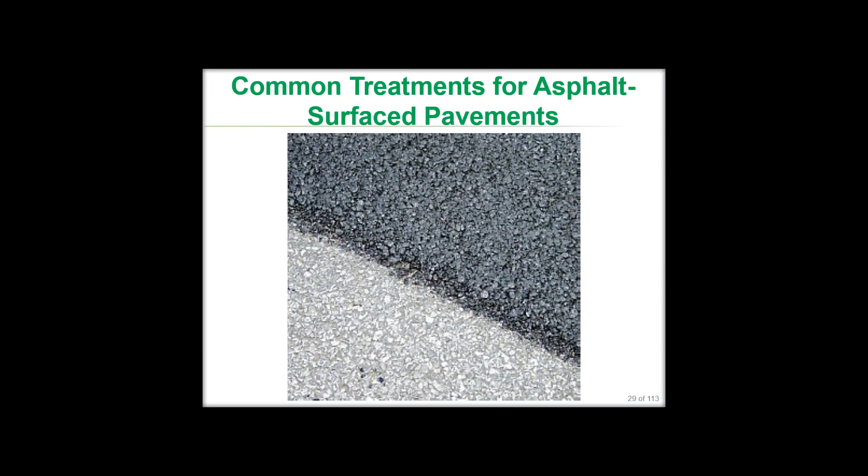Surface on a major high volume pavement, and really keep it in good functional condition if we have enough structure. There are various hot and cold surface recycling techniques that can be used that can remove some of the top surface, rejuvenate it in a way, and relay it.

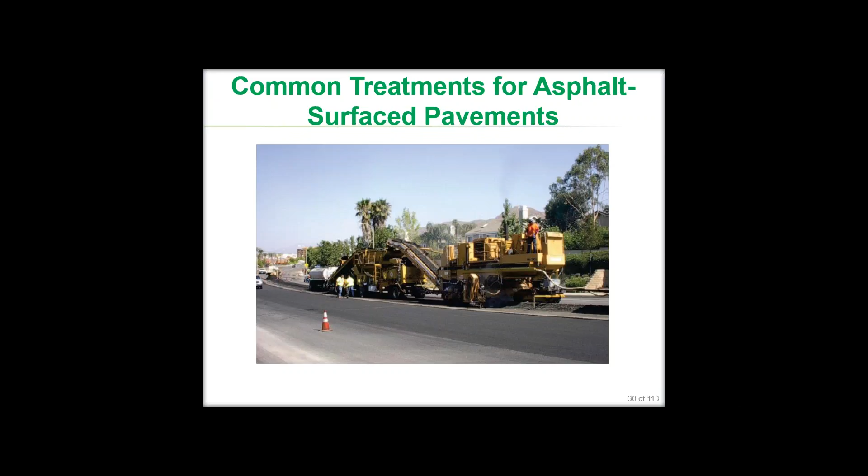I will say with the hot in place techniques, they can be very effective, but they do consume a lot of energy. And then there's also white topping options in which thin bonded concrete overlays can be put on top of asphalt pavements.

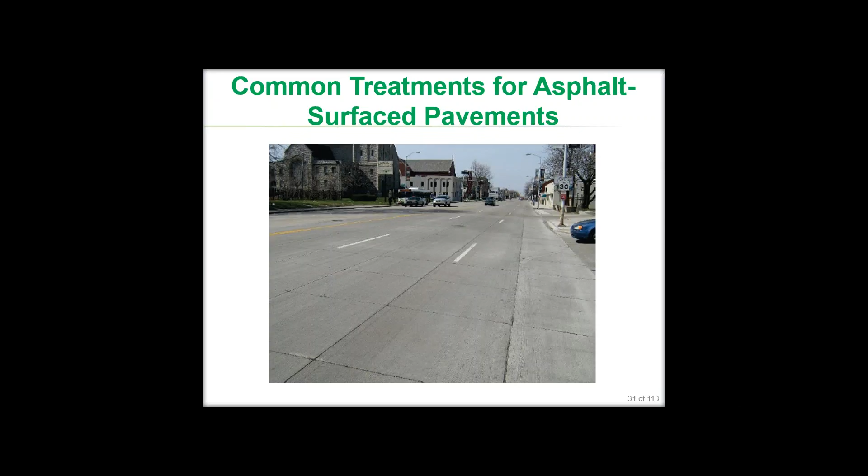When we look at some of these treatments, you'll notice that things like those thinner HMA overlays or heavy chip seals have a higher energy use and higher greenhouse gas impact than some of the lower intensity applications like fog seals or slurries.

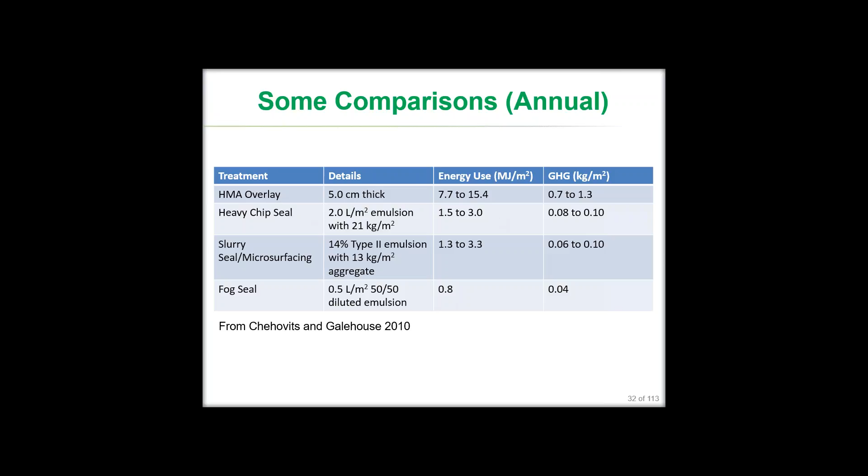But at the same time, life is almost directly proportional to this energy and greenhouse gas production. So things like fog seals will have a very short life, whereas HMA overlays can have a very long life. And so you really have to look at the best approach over the life cycle.

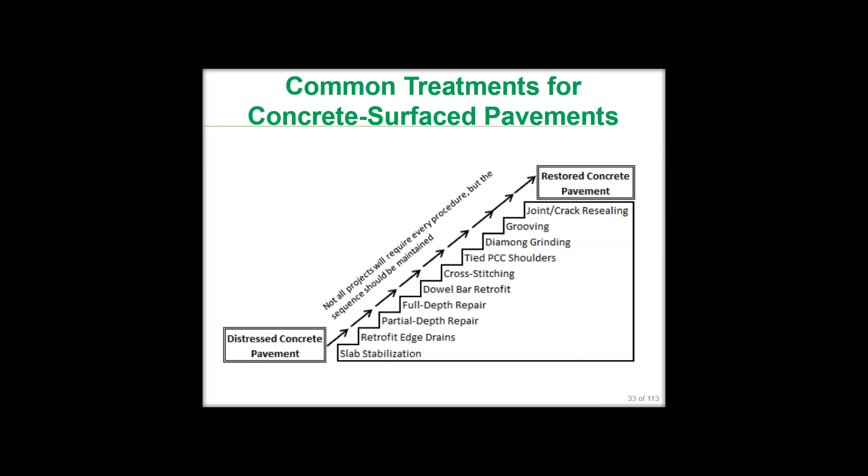Moving to concrete, there's this whole kind of tiered system as we do concrete pavement restoration. Many techniques are available, but not all projects will need every technique.

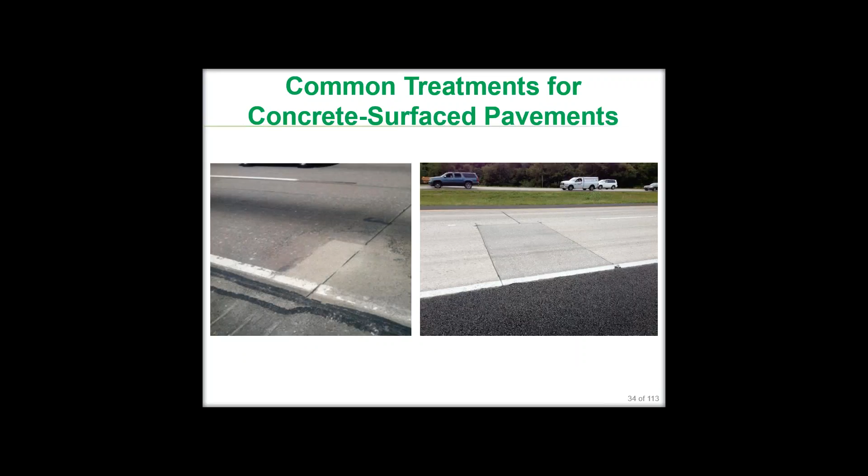Very common things that are done to restore ride quality can be partial depth repairs or full depth repairs, where you have a failure at a joint, for example.

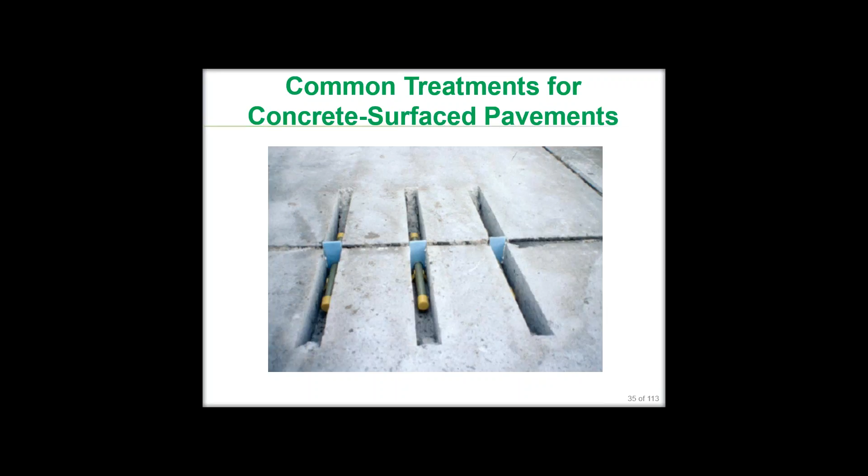A technique that lately continues to become very popular is dowel bar retrofitting, in which load transfer has been lost. It's a way to address the underlying causes of faulting, for example a drainage issue or other issues, where we can restore load transfer through the insertion of dowel bars, and then follow up with something like diamond grinding.

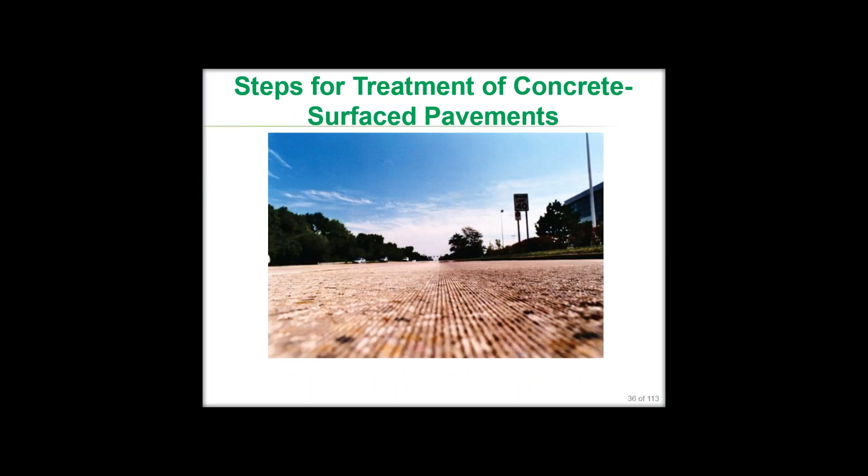So when we look at grinding that surface, once we repair the rest of the defects, we can hit it with a new surface, very similar to the finishing of a hardwood floor.

And within diamond grinding, what we find is a significant reduction in roughness, improved skid resistance, and reduced noise level, with the addition of no additional material. So from a concrete perspective, this is really quite a good technique.

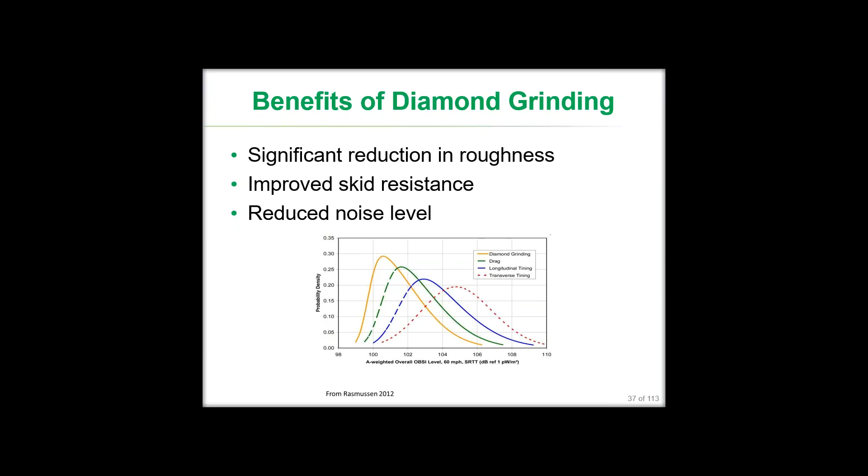Also, we have different surfaces available. There's conventional diamond grinding, and there's also next generation grinding, which can actually significantly reduce the noise levels even more.

So really, in conclusion, when we look at preservation, it's broadly believed, and research has shown, that preservation is inherently a very sustainable practice. We can keep good pavements in good condition, smooth pavements smooth, quiet pavements quiet, and safe pavements safe, through very low amounts of new material being used, little to none, and very little disruption to traffic.

There are multiple options that exist, and they continue to grow, I think. There's a lot of innovation occurring in preservation right now. So it's actually, as far as pavements go, a pretty exciting area to be looking at. So you need to do your homework.

Sustainability impacts on low volume roadways, as mentioned, are very closely correlated with agency costs. So as agencies balance their budgets, they're really applying a sustainable solution to low volume roads generally. What we find is because of the very heavy influence of user cost on higher volume pavements, there's a deviation with agency cost. And so greater integration needs to occur for high volume roads to really maximize the benefit of preservation from a sustainability perspective.

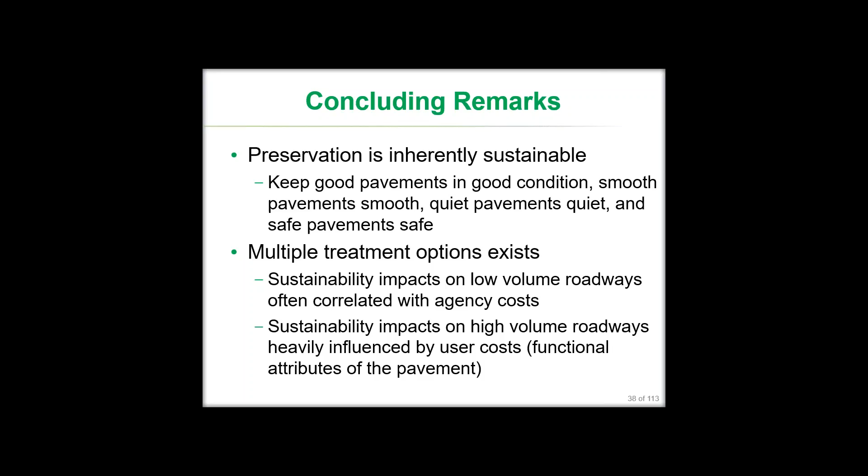And so I believe that is quite possibly my last slide. And so now hopefully, Kurt, we'll turn it over to Imad.

As you already know, these 5 phases are the production of pavement materials, the construction of pavements, the use of the pavements during its service life, which we always refer to as the use phase, and finally the end of the pavement's life.

When the pavement reaches its end of life, it can be recycled and allowed to remain in place, reused as part of the supporting structure for a new pavement, or of course removed from place, recycled and put back. Or the second case here is removed and landfilled.

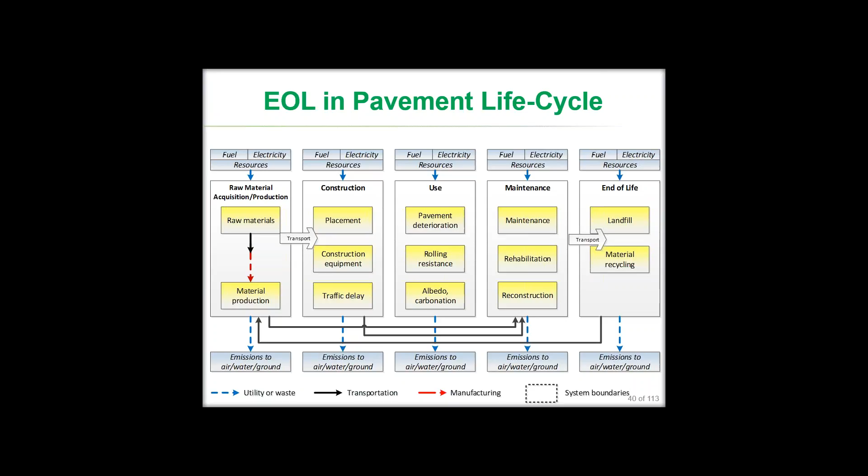Each of these activities has an economic cost and environmental impact, such as the consumption of raw materials, energy input, as well as emissions, which should be considered as we are discussing the end-of-life phase.

As quality aggregate sources are depleted, there is a growing importance given to incorporating recycled and industrial byproduct materials even more aggressively in new and rehabilitated pavements.

Therefore, pavement end of life is defined as the final disposition and subsequent reuse, processing, or recycling of any portion of a pavement system that has reached the end of its useful life. This can be done either as an on-site or off-site recycling operation. It can be reused in new pavement layers such as overlays, or it can go through landfill operation.

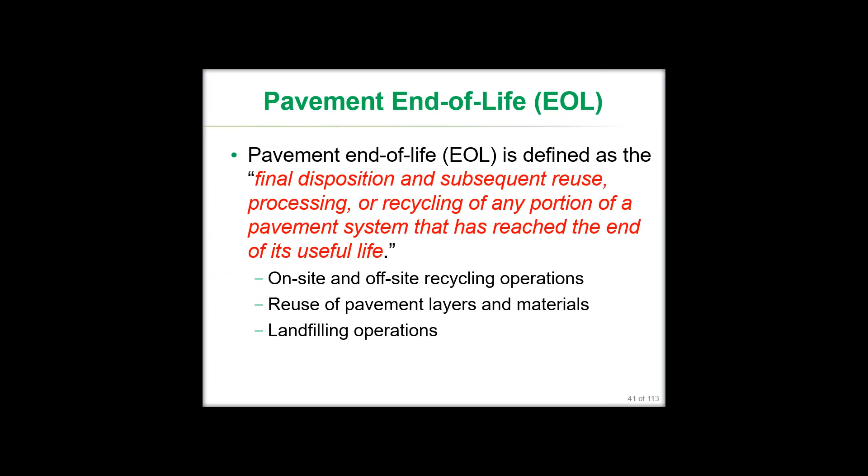So for both asphalt and concrete, we have three end-of-life options. For asphalt concrete, the first option is to remove the pavement to a central plant, where it will be further processed in order to replace virgin materials in the subsequent application. That's what we usually use for hot or cold central plant recycling.

Then we can use it on-site as part of full depth reclamation, which I'll be talking about later today, and recycle it as an AC layer for a new pavement application. We can also dispose of it in a landfill after milling, removing, and transporting it to the landfill site.

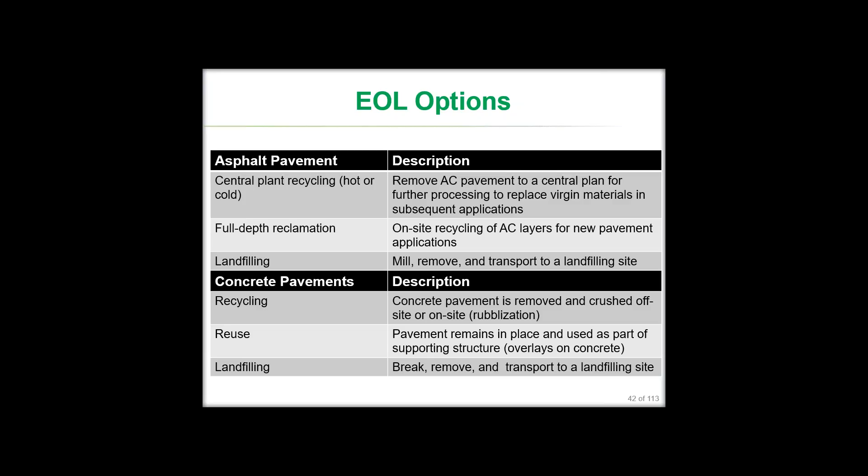For concrete, similarly, we can recycle the pavement by removing it and crushing it off-site or on-site, or sometimes do rubblization. We can reuse this by keeping it in place and using it as part of a supporting structure, then overlay it with either asphalt concrete or Portland cement concrete as white topping. And of course, we can break it, remove it, and transport it to a landfill site.

An ideal goal would be to use recycled material to produce a long-lived, well-performing pavement, and then at the end of its life be able to use those materials in a new pavement, effectively achieving a zero waste highway construction stream. This would not only produce distinct cost advantages, but would also provide significant reduction in energy consumption and emissions, and would eliminate the need for landfill disposal.

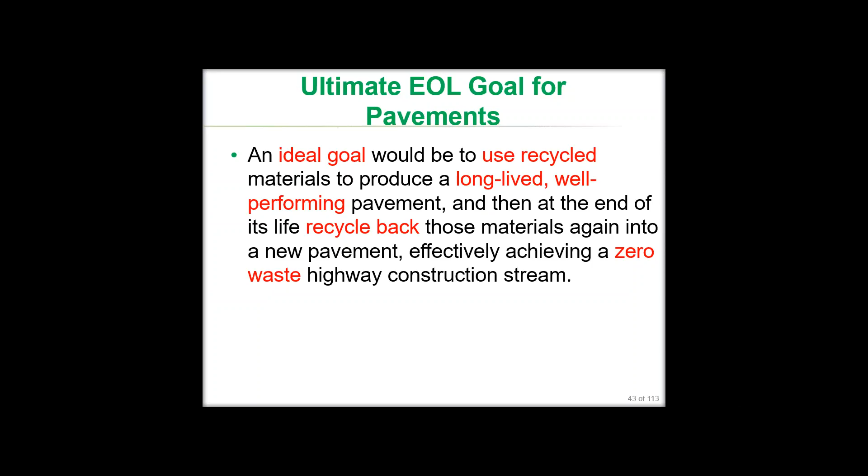So if you look at the asphalt concrete recycling statistics, the recycled pavement can be reused either as a pavement base layer or included in a surface layer. In addition, we can use this for embankments, fills, and scores of other potential uses. According to recent industry data, it has been shown that less than 1% of recycled pavement was sent to landfills.

So for asphalt concrete in particular, the total RAP used as reported in 2013 was 68.3 million tons, which is really significant.

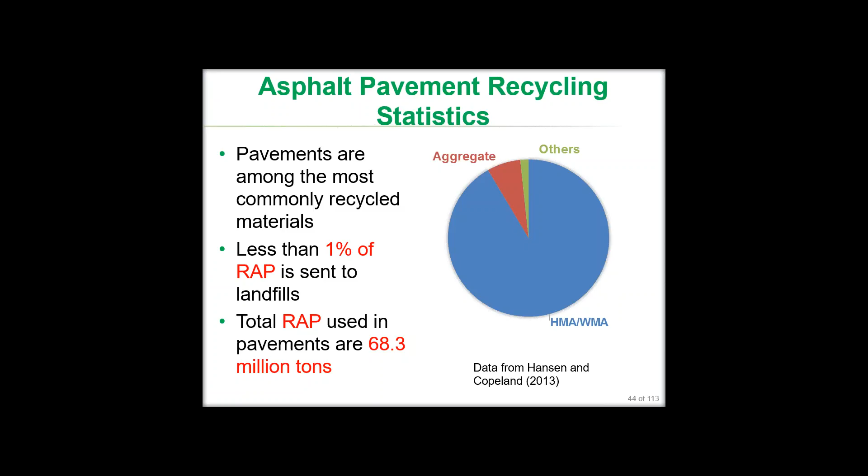If you look at the figure in front of you, you can see that most of the asphalt concrete has been reused in hot mix asphalt or warm mix asphalt, and a good portion has been used in aggregate. We are also using it now as black rock in concrete, and there's just a small amount used in other places. And again, it's less than 1% used in landfills.

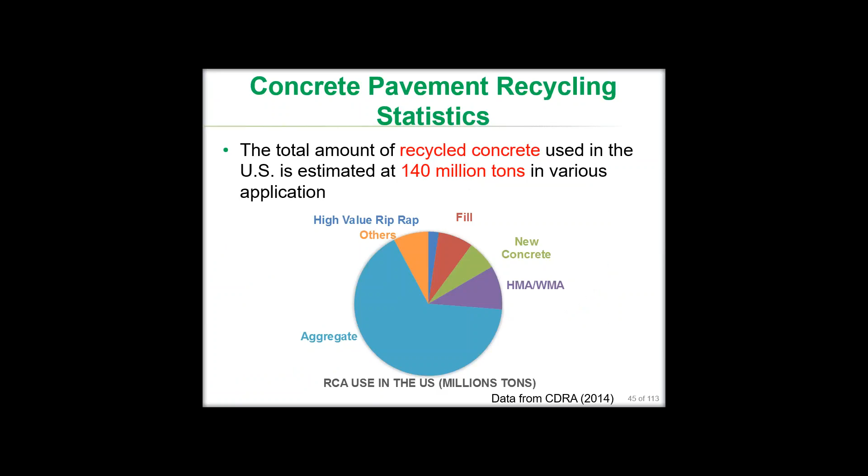On the other hand, for concrete pavements, the total amount of recycled concrete is estimated to be around 140 million tons. These recycled pavement materials can be used back in new asphalt or concrete mixtures, or used as aggregate in base layers, or even in a number of other uses such as fill, riprap, and ballast, as shown here in the figure according to CDRA data in 2014.

So using pavement materials at the end of its life is accepted as one of the most effective ways to improve pavement sustainability. However, a comprehensive economic and environmental analysis for recycling and reusing pavement materials must be done in order to fully quantify the effects of the various end-of-life options.

Major contributing end-of-life unit processes are the landfill, recycling operations, as well as transportation. For example, pavement recycling is highly affected by material transportation cost as compared to the cost of new virgin materials delivered to the construction site.

Hazardous waste in construction and demolition waste landfills comprise a small percentage of the recycled materials generated from pavements. Therefore, the long-term environmental impacts of landfill resulting from pavement recycling materials is insignificant. It has to be noted that recycling processes include removal, transportation, crushing, screening, and stockpiling.

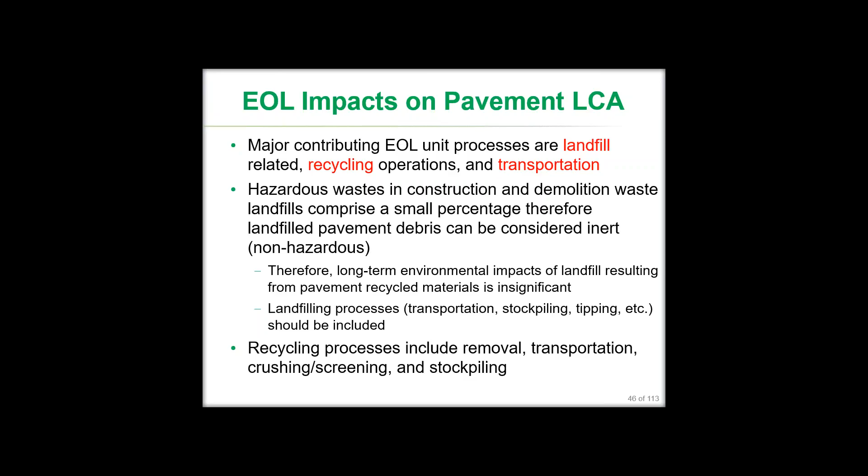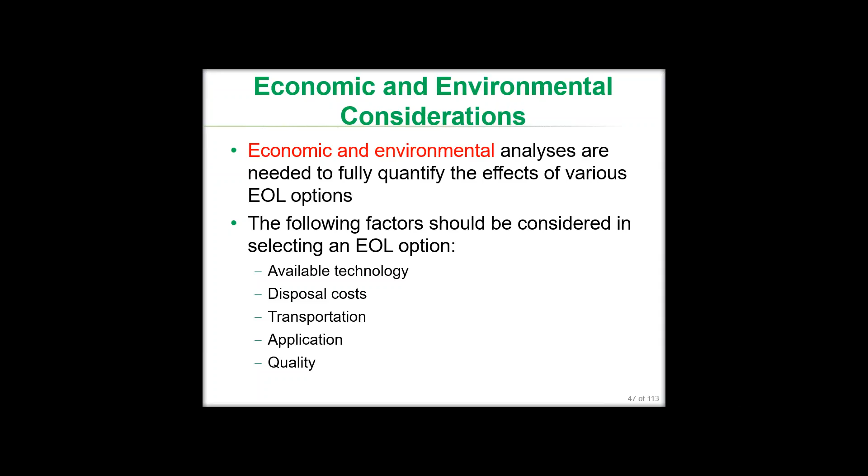We have different options available for recycling asphalt and concrete pavement materials. However, in order to assess realistic benefits for recycling, all recycling options and their associated costs should be evaluated. The important factors that contribute to the cost of pavement recycling and environmental implications are the available technology, disposal cost, transportation, application, as well as the quality of the recycled materials.

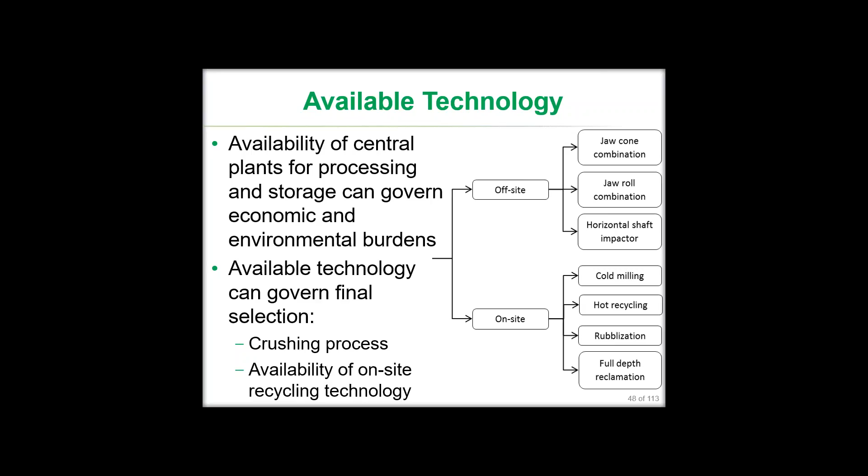The available technology can be an important driving cost determinant for on-site and off-site recycling. If the pavement is recycled in a central plant, the environmental costs include demolition at the job site, crushing, screening, and stockpiling at the plant. On the other hand, the construction equipment used for on-site recycling includes cold-in-place recycling, hot-in-place recycling, rubblization, and full-depth reclamation.

If the recycled pavement materials are disposed at a landfill, the total disposal costs usually include the demolition, the landfill tipping fees, and the transportation, which includes trip distance and what kind of mode we are using, such as a truck, trail, ships, and so on. The landfill tipping fee can range quite a bit.

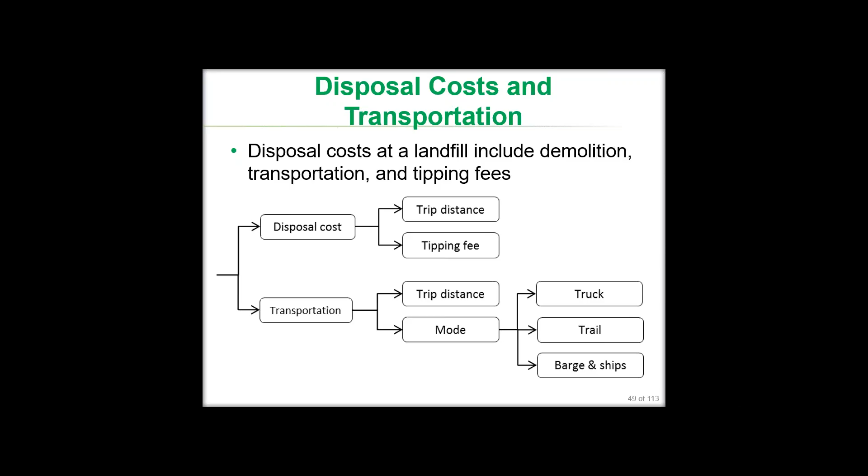It can be from $10 to as high as $70 per ton. But a very important consideration for landfill disposal is the diminishing number of landfills that are available for us to dump the pavements that we're planning to put in a landfill.

The quality of recycled pavements, its process, storage, and local specification always determine its final application, as I mentioned earlier. It can be reused in pavement layers, embankments, fills, as well as other potential applications. The quality requirements for using recycled pavements can be different for asphalt and concrete pavements, including surface and base layers. The potential contamination risk that we may have in the recycled pavements can also limit its use and application.

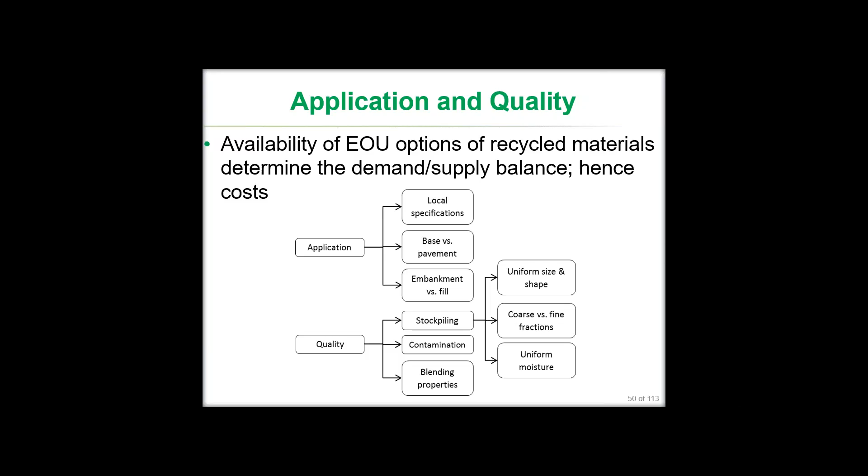There is no doubt that there is an increasing interest in the notion of what we refer to as closed loop, or zero waste thinking, which will promote standardization of the recycling process. And of course, this will improve the overall sustainability as well as the overall quality of pavements.

In our approach to develop a strategy for optimizing the use of recycling options, assessments considering all environmental and cost determinants are needed. Hence, all four concepts of sustainability assessment should be applied, including the functional performance, which means the resultant pavement should be equal to or better than the existing pavements, or what we were planning to do without the recycled materials, when it comes to performance.

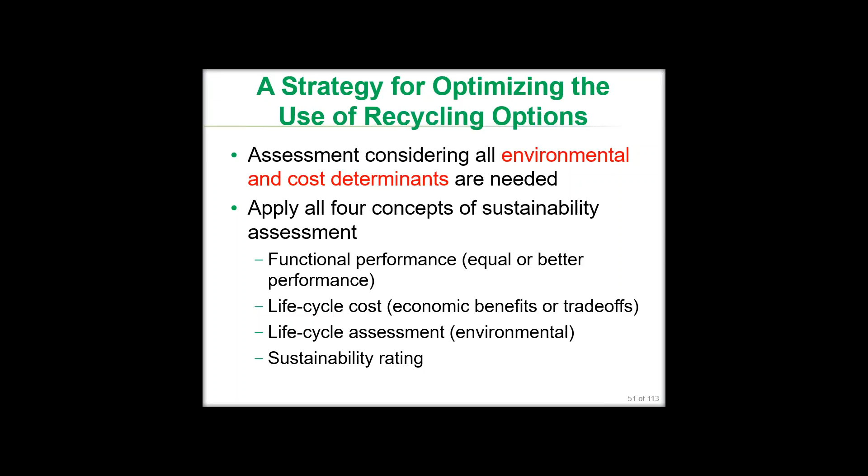From an economic point of view, the life cycle cost should be better than if we are using regular materials. Otherwise, it will not make sense for people, or there will be no incentive for people to use it. Third, the life cycle assessment should show that there is a positive environmental impact, adding to the sustainability rating that we are getting from this.

So it's critical in a closed loop pavement or zero waste pavement system to quantify and measure the benefits to incentivize contractors as well as owners.

Some of the relevant questions that need to be addressed to generate robust, realistic, and scalable assessment of pavement recycling include: how much environmental credit or burden should be given to recycled materials—what is the environmental impact of recycled materials we're planning to use? Who's going to bear the burden or enjoy the benefits? Is that the initial producer or the last producer or user of the recycled content?

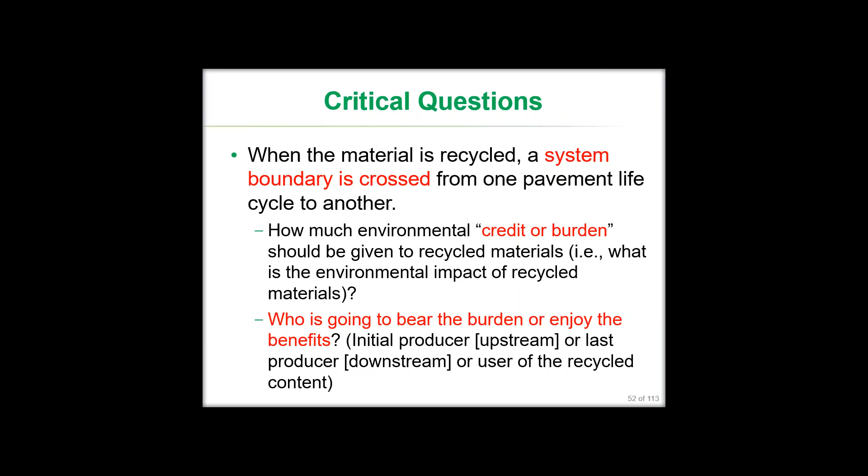Where should these credits be counted? How should transportation be counted in any model used for this? Which life cycle stage should it be assigned to? So LCA deals with these issues through allocation rules.

Allocation is defined by ISO 14044 as partitioning the input or output flows of a process or a product system between the product system and one or more other product systems.

There are several allocation rules and procedures applicable for recycling materials. Using a set of rules for recycling pavement materials allows defining whether the upstream or downstream procedure should receive recycling credits. By the way, ISO 14044 defines a closed loop as being when a material from a product is recycled back into the same product system, while defining an open loop as being when a material from one product system is recycled into a different product system.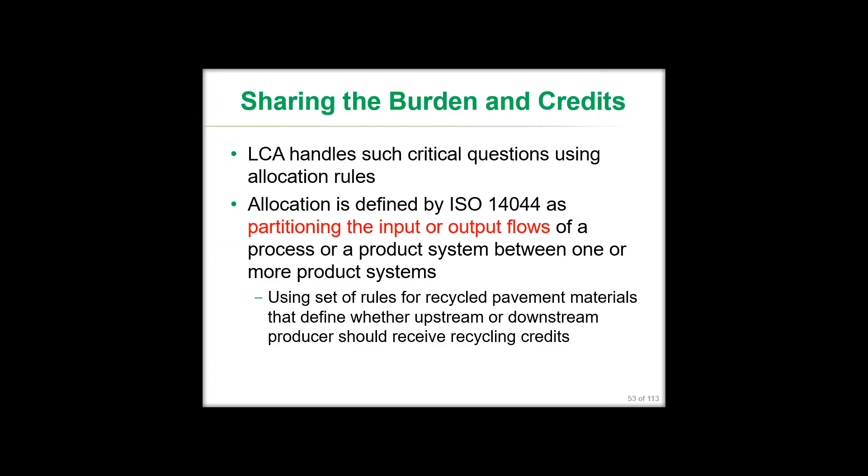The most commonly used allocation methods for pavements are the cutoff and substitution methods. In the cutoff method, all benefits of recycling are given to using recycled materials. The life of recycled materials starts at milling of the old pavement, followed by transportation to a depository place for processing, and transportation to a job site in order to be reused.

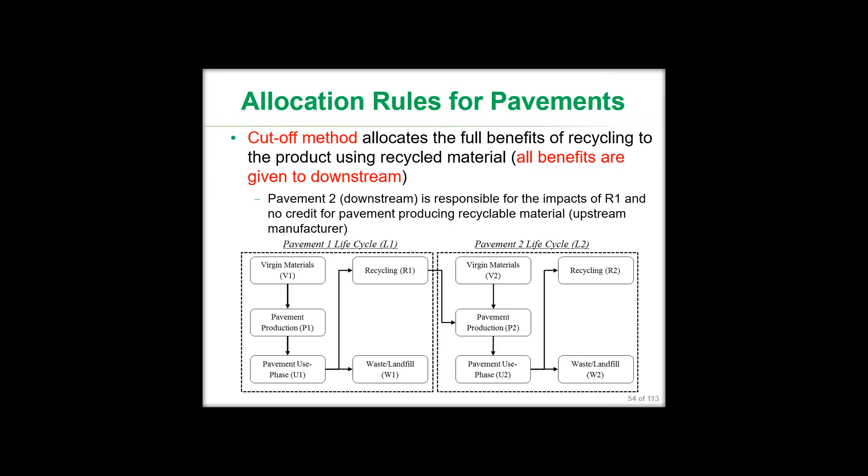All benefits are given to the pavement using the recycled materials by reduction in the use of virgin materials, without any prior knowledge about the rate of recycling at the end of its life. The substitution method, on the other hand...